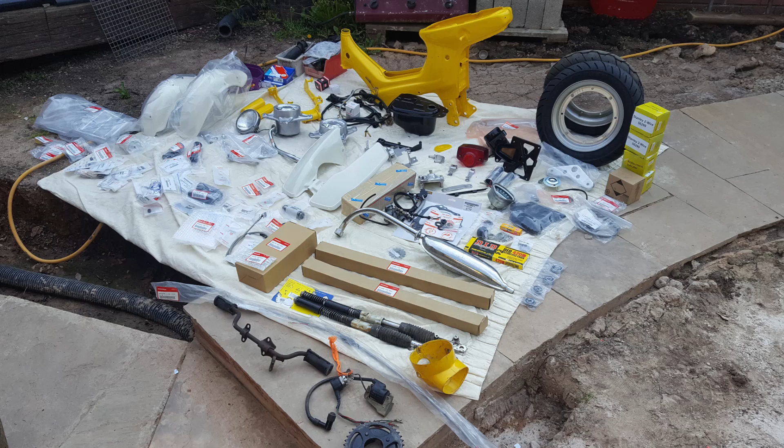The hubs were meant to go away for paint with the frame, but unfortunately this hub needed repairing and I just didn't have the time before I could take the frame in. It's a genuine hub, but unfortunately it suffered at the hands of a complete and utter moron who's prized it apart with a screwdriver, crowbar, whatever. You can see it happened some time ago. There's quite a bit of dirt within the damage.

I've cleaned this one up. It's a very thin wall there and it forms like a labyrinth seal, so it's not structural, but we still want it to look good. I think they're worth saving, these hubs, because the genuines, if you can get them, are very, very expensive, and I don't want to put an aftermarket on. I want to return them back to their original painted condition, so I'm going to try and match the colour as close as we can.

I really am not looking forward to this, because it's pressure die cast, 40 odd years old. God knows what's in it. It's aluminium, it's thin, and unfortunately it won't fit on my lathe either. It's too big a diameter for the throw of my lathe, so we're going to have to contour this back manually by hand, and we've also got to create that profile in there. I don't think this one would be so bad, but this I'm not looking forward to. So here we go.

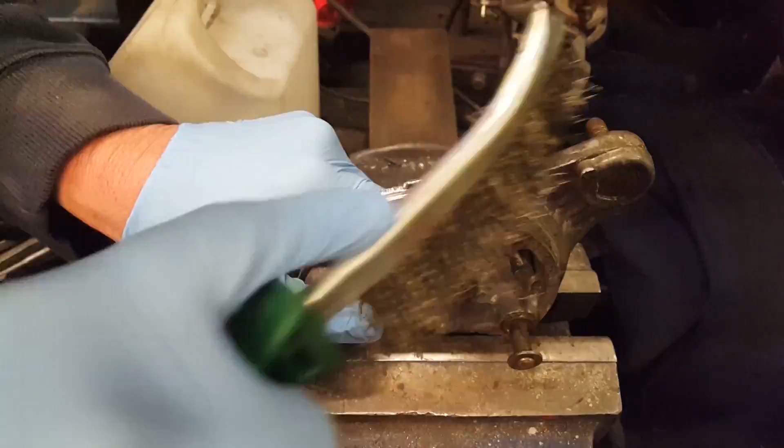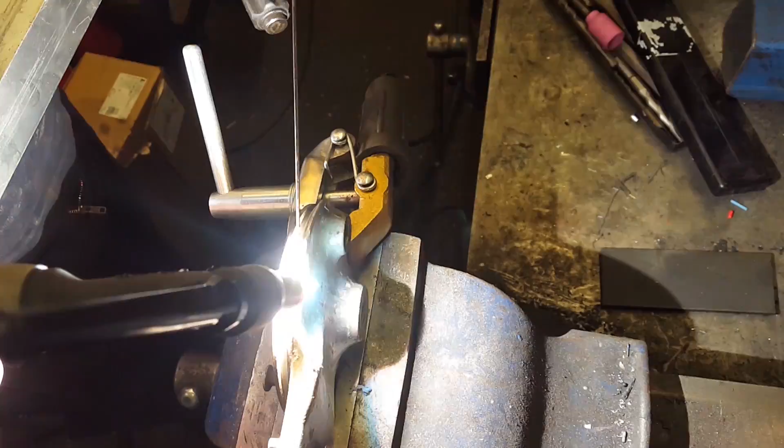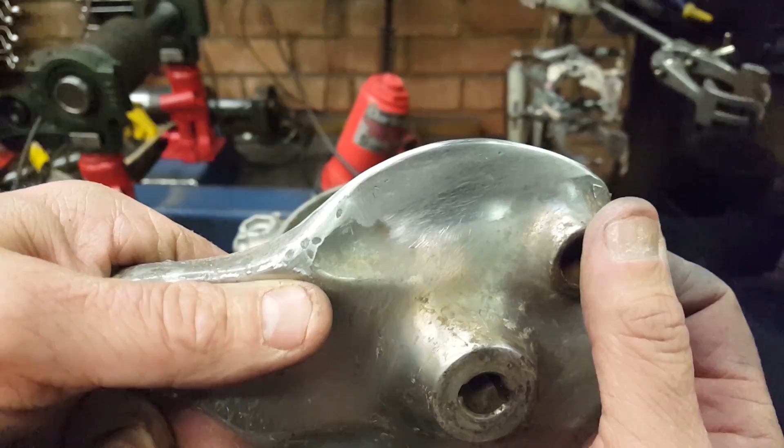I've finished this piece now, and I'm happy with the results. I think putting quite a quick bead, quite a thick bead on helped quite a lot. So we've got the profile back there. Thickness is near enough the same from the old to the new. The radius is good, and I've simply flatted this off. You can still see a bit of linishing marks in it, but the powder coating will contain this. So yeah, it starts about there, finishes about there,

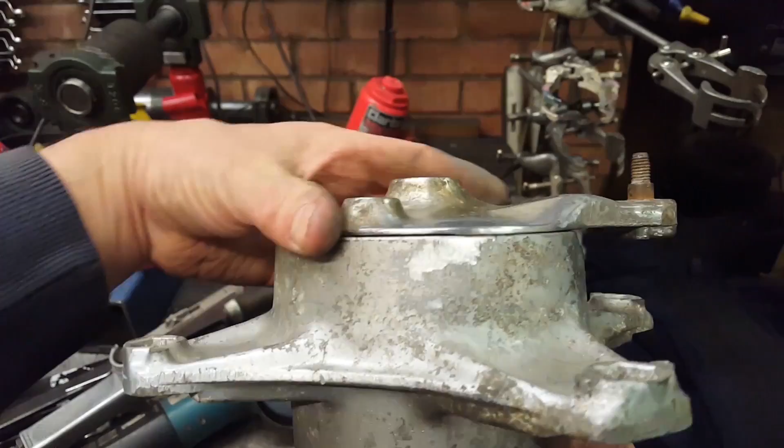and so it's kind of similar to there, about 1/2 mil over. It's about the same there. So that's the outer done. We're now going to do the worst part.

So we've took this back with a linisher, cleaned it there. I'm a little bit concerned that we've got some porosity in the aluminium when I linished it back, so this looks like it's going to be fun. So we've took it right back, just going to use a bit of acetone, clean it up, and we're going to go for it. I'm going to weld it from the inside of the hub outwards, so any excess starts to build on the outside, which is what I'm hoping to come out, rather than going from the outside in and making it harder to get this profile back.

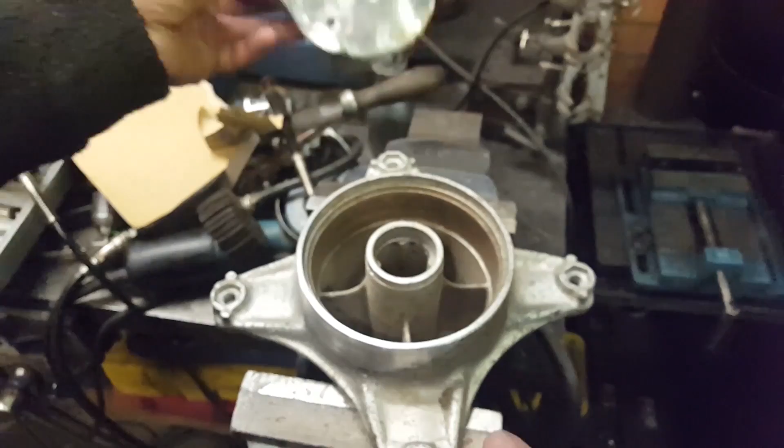So we're all finished now, and we're going to get these up the shop for paint. So I just showed you that one previously, and then this one's all finished now. It was all done by hand. As I said, I didn't have a lathe big enough to fit it. We've got some tiny dots of porosity in it there. Maybe a bit of muck has come up. I mean, I'm welding inside an old brake drum. God knows what's inside there, asbestos, whatever, who knows. So you can see some tiny little dots there, but I can live with that.

I've simply done this with a series of belt sanders, linishing discs, and then by freehand using files. All the inside was done, roughed out with a little die grinder, Dremel, if you want to call it, to get the profile back, and then that was also finished with internal files and sandpaper. So hopefully you can see that as it goes from the old to the new. I measured it up and it's real close. So I'm really happy with that for freehand. So we're going to get these all cleaned up and painted.

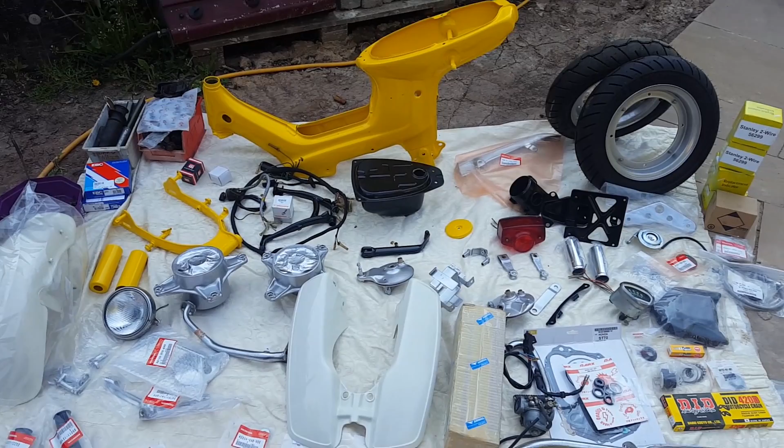There's the two broken sections together. So the collecting is complete. We have parts here from all over the world, literally. The furthest one's Australia to where we are, Indonesia, Japan. It's quite a collection. All genuine parts.

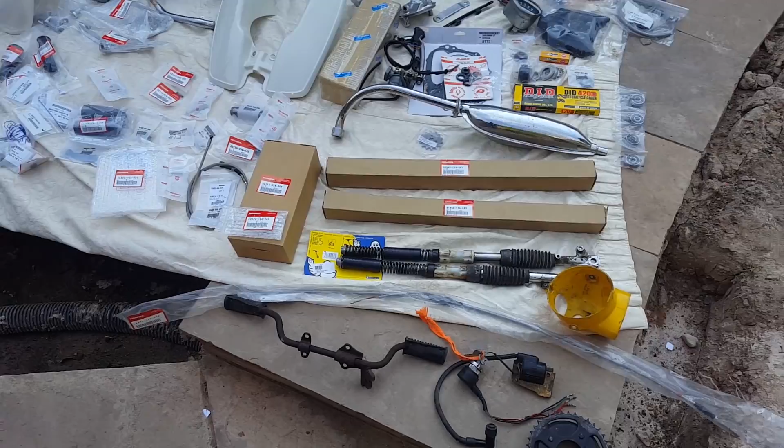The only parts that aren't genuine is, I suppose you could argue, I used SKF bearings. Also for the engine I've used SKF. I prefer SKF, so I chose to fit those. Cables, indicators are still Stanley. Battery, arguably not. This is the original headset. I had this chromed.

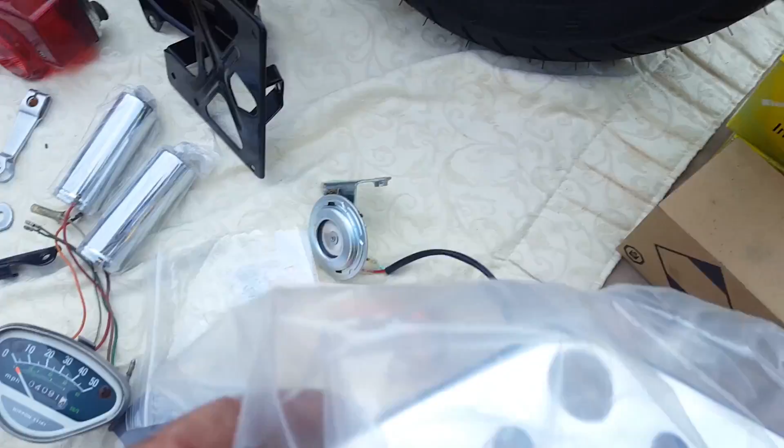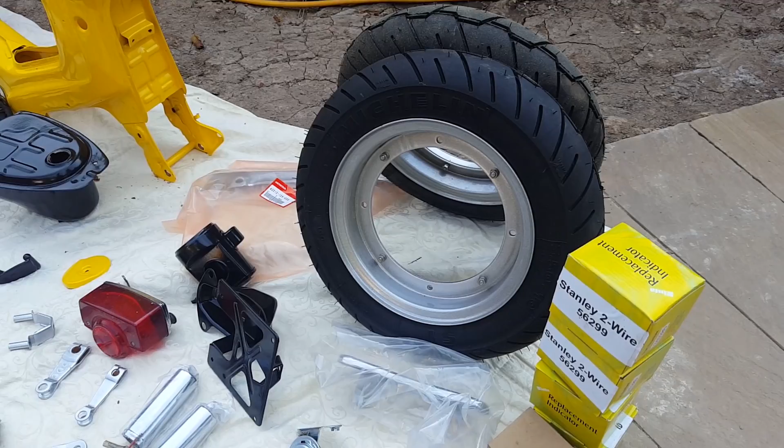The only trouble with this chrome, it's so good, it shows up the Honda chrome as new. Wheels were eBay, and then I had them powder coated. Rear tail light. Genuine light that come with the bike. These were the, are they stainless, are they not, parts of the suspension. I had these chromed by the same company that done the headset. And that is just amazing, absolute mirror considering how pitted they were.

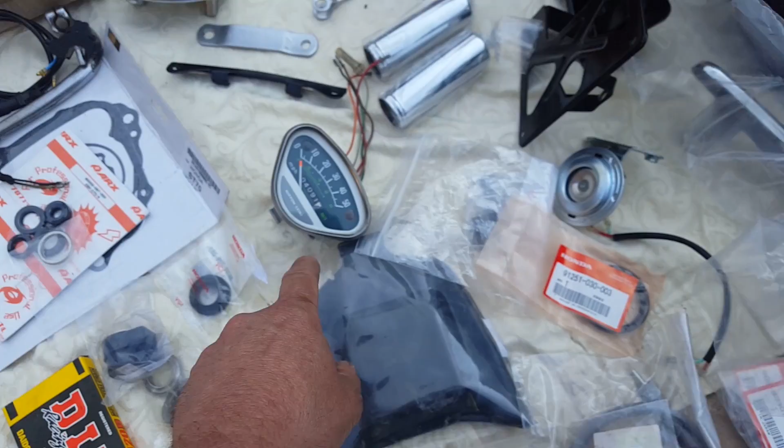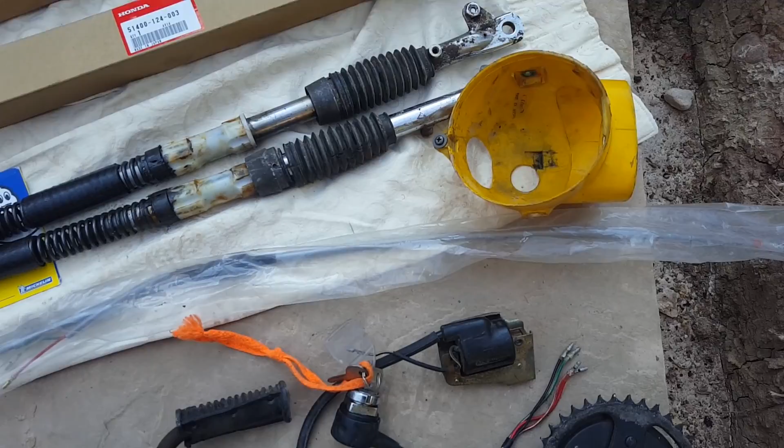Genuine horn, the genuine clock that come with the bike. These aren't genuine because I couldn't find genuine. Every time I went in with a part number, they were obsolete. Aftermarket exhaust, genuine forks with the old damaged forks. Headlight has still got to go away for paint, we've still got to get that done. Chains and sprockets have been replaced with DID chains and sprockets.

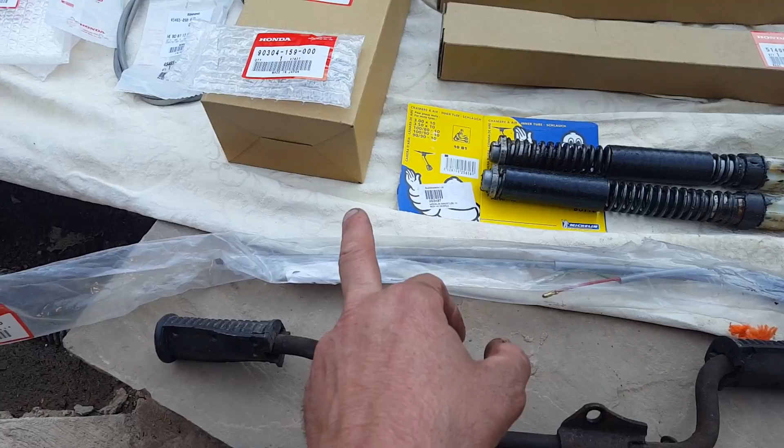Original ignition with the bike, that's bent, but this is what come with the bike. Until I've got the bike a bit more together, I won't know where to straighten it, what to do, and I've got no other one to compare it with. It will stay on it because it's genuine. New mirrors, brake cables. That's genuine Honda, that's not fiberglass, that's not eBay, that's a genuine Honda one and it's genuine colour.

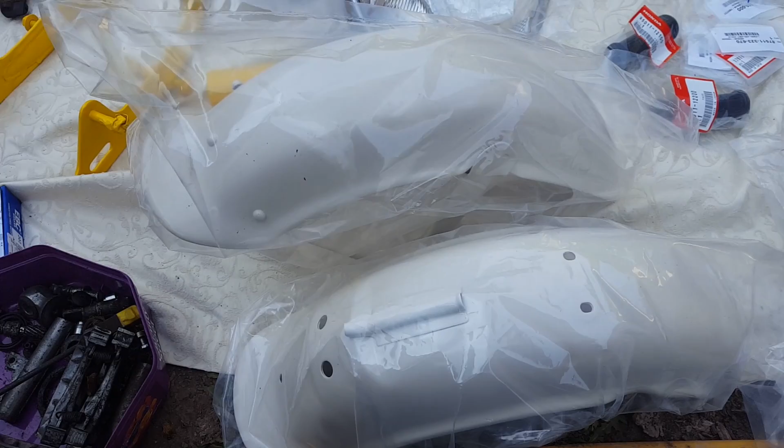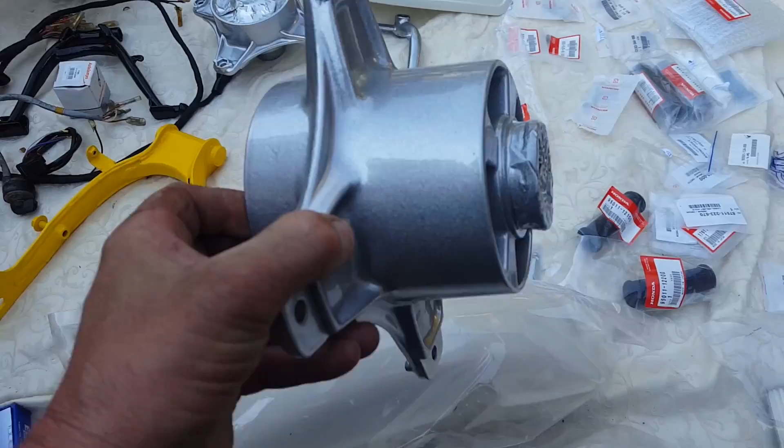These are the mud guards that you've seen in the part 1 video, and I've had them colour coded to match the Honda. These are the hubs that I repaired. Okay, and as you can see, it come out really nice. So all new bearings to go in there. This later appeared for the bike. I had a call that more parts were found, and this is the 2-bulb headlight, which is quite rare now, quite hard to find, so I was really chuffed to find that.

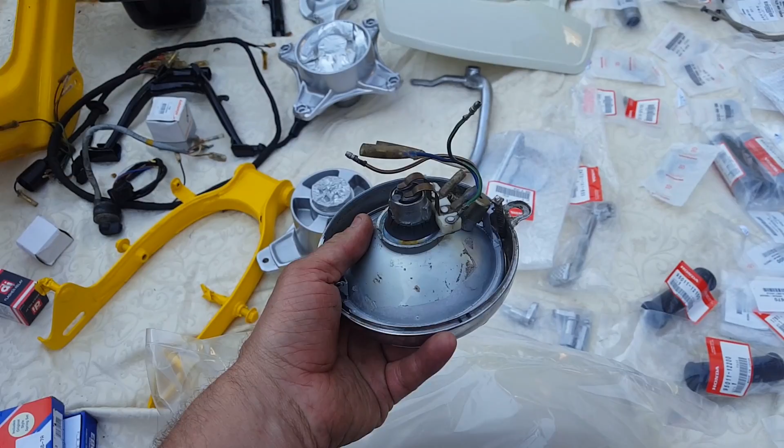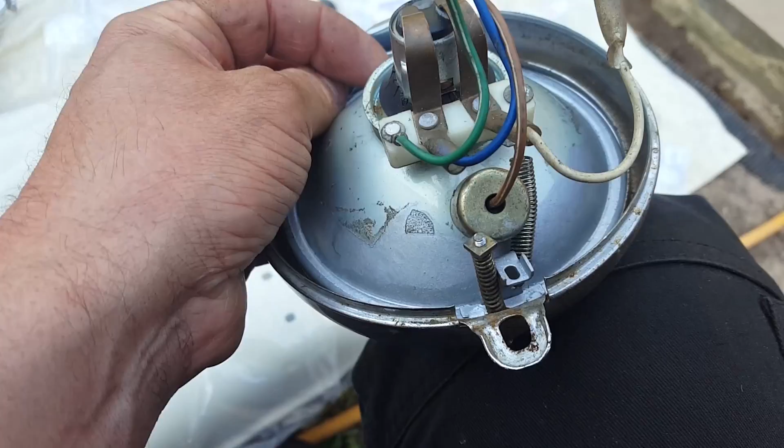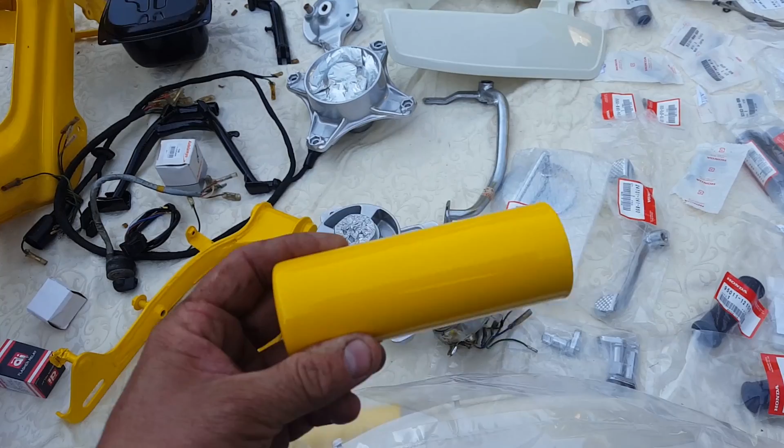The chroming on the outside is poor. I can't find a rim, I don't even mind non-genuine because I'm that desperate, that has the one that takes the split pins just here. All of them are just tabs like this design here. I need the split pin type that takes the 2-bulb headlight. Indicator stems, brand new gear selectors, mirrors. This was what we straightened with the socket.

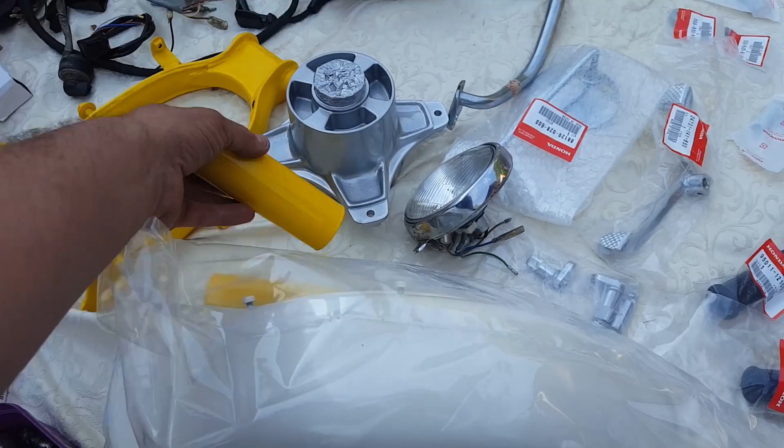This is the rear suspension. Really good job of the powder coating, they've even done inside of the tubes, which is quite rare. I mean, they could skim that, but they haven't. They've done a really good job of that. There is absolutely no dents on there. That's come out really good. There's the other one. Especially in the gloss, you can tell quite easily, and that's come out really well.

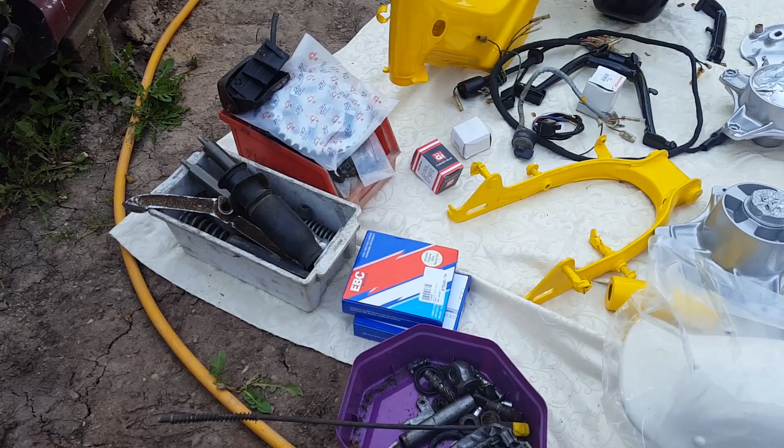This is still my mystery corner. Having bought the bike in a cardboard box, there's bits there I don't know what they do. Obviously I know that's the carb and those are brand new brakes, but we got just stuff in there, stuff there, who knows. More electrics. Stand that come with the bike's been powder coated. That's the tank. Tank's been done. Filter, that is the light that come with the bike. Airbox.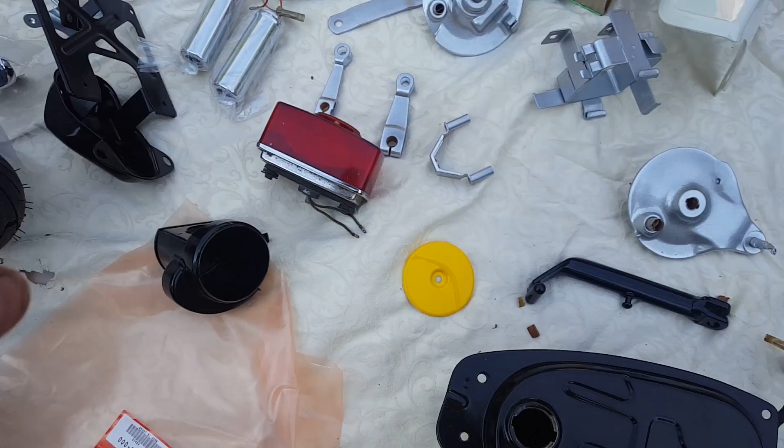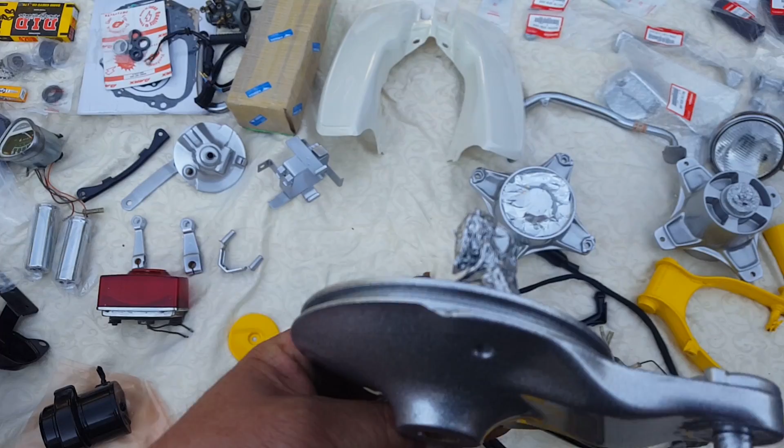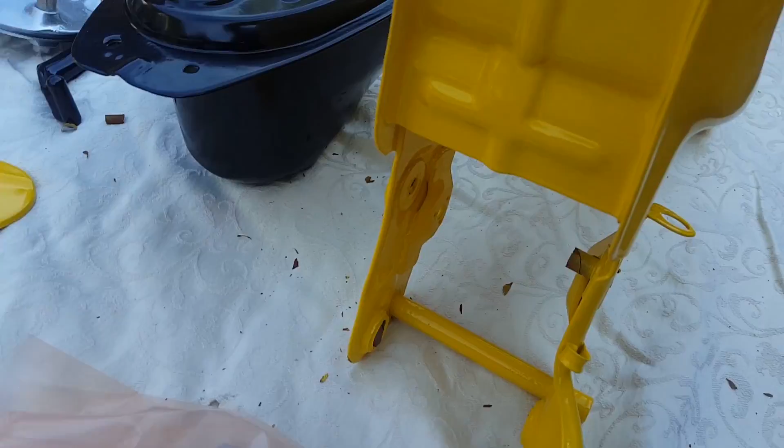New chain guard that, comparing the chrome with what I had done, isn't that good. Battery carrier. Remember we welded this up as well around there somewhere. That's come out really well. Brake units. So there you go, you get the gist. All the paintwork's been done right inside here, which I'm really impressed with. Really was chuffed with that. Right into the seams as well. Remember all the rot down here. All that's been done. Underneath the bike. Really have done a super job of that.

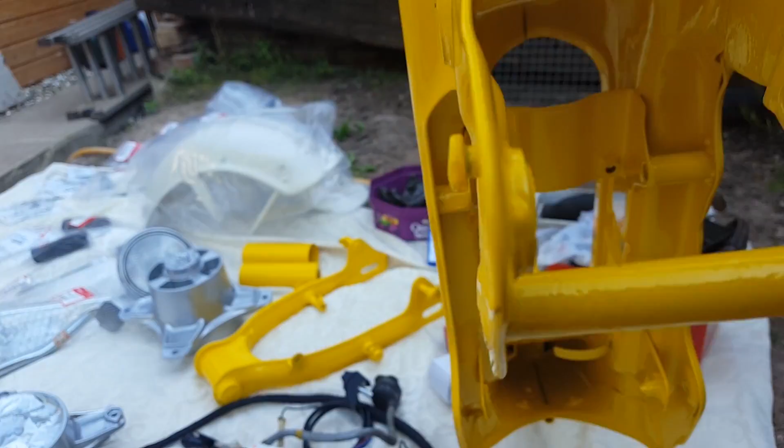So now it's the big build, working out what goes where. I've never seen the bike as a whole, so this will be really fun.

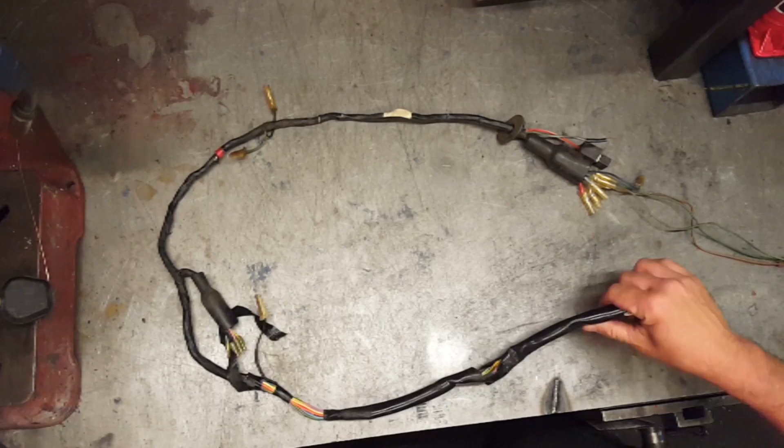Looking at the loom, it's got some areas of concern. You can see this brown earth wire here has gone through. It's very brittle here, the protector's gone. Yeah, this is the front of the bike, so this would probably be where the steering turns left to right and it's gone through. So we're going to take this back here, measure where it originally went to. We've got some damage here, so that will be another wire that we need to change.

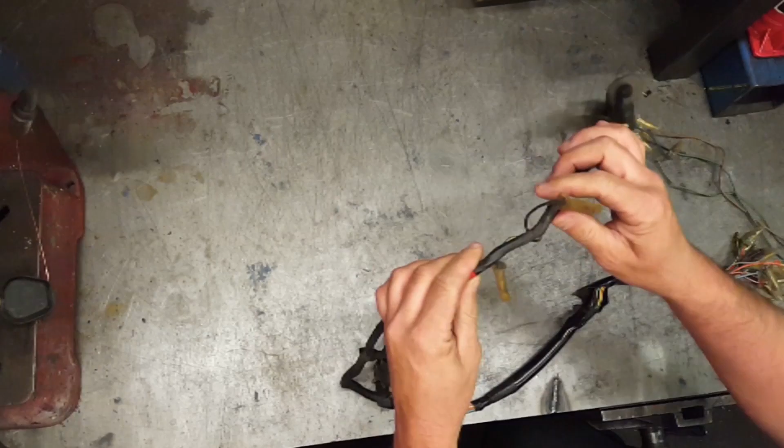Same on here. So we'll cut it back now in areas, peel some of the tape back. It's quite brittle in places round about where the heat has happened. And we'll see what's what and replace what needs to be replaced.

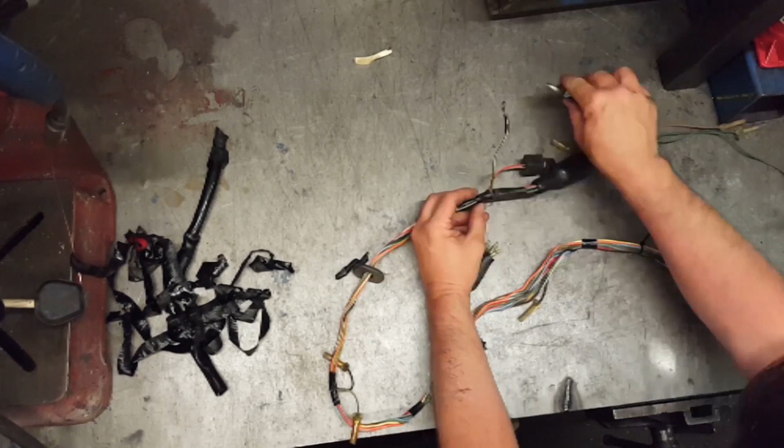So the loom is now stripped down bare. I've taken all the bits of tape that covered the soldered joints.

There's a few here near the rear of the bike, and some more down here, another one there. These are all originals, and some really interesting wiring - it goes black to black, then they drop a red in, then red with a white trace to red with a white trace, then they chuck a red in. I've looked at the wiring, and that is correct for the 1978 Chaly.

So what I've done also is mark down the position of each of the branches off the loom, so if it helps anybody - measuring from the headstock, the headlight at the very end here, to your coil, a black wire, is 520. Again from the head to the engine, which are those colours there - turquoise with a red trace - that's 720.

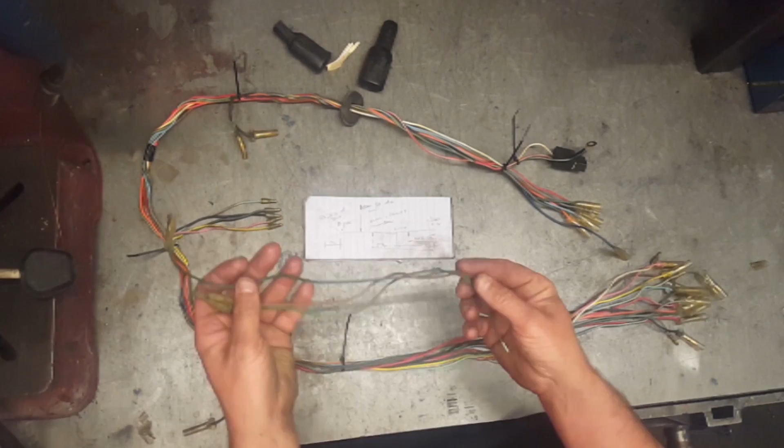The 3 wires that go to the rear tail are all worn through, so it looks like it was resting on the tail light, so we're going to have to change all of those, put new ones on. The brown, as we've seen through the damaged casing, has practically gone through, and the red has got a nick in it, but when you look closely there's a lot of water ingress there, so we're going to change the red. I don't have this 4-way setup, so unfortunately we're going to have to joint that wire.

I didn't want to do that, but I haven't really got a choice. Plus I wanted to keep the original connectors if they were in good nick. So that's where we're going now - a red, a brown, and a bit of work on some ends.

We have got something going on down here. It's quite stiff, the wiring. There doesn't seem to be any insulation cracking, but that's very, very stiff, so it's obviously been round a hot area, or very close to the exhaust or over the back of the engine. So I'm hoping to get away with that area, but I think we'll have to do something there.

And the solder joints seem to be okay there, so we'll look at that later. So let's get on with that then.

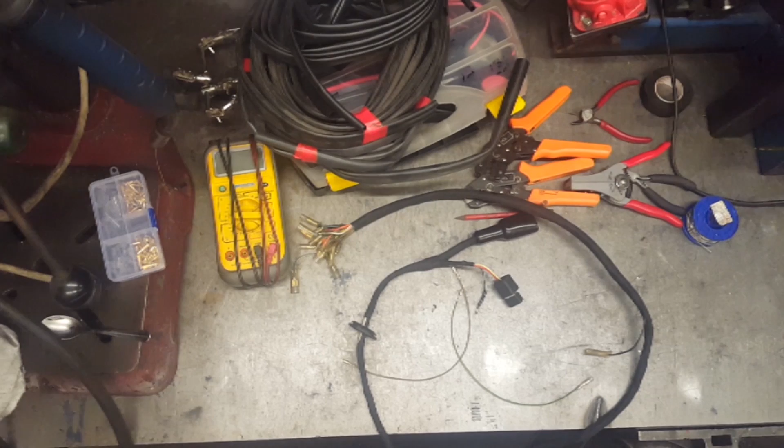Okay, the loom's now finished. I replaced the damaged wires that you're seeing. I also managed to get hold of 2 new boots, genuine Honda boots for the ends. I got hold of a genuine Stanley new old stock rectifier because the other one had a crack in it. I thought I'd better get one.

I also got this grommet, that's from CSML or something like that - managed to get hold of that. I reattached the original serial number for the loom and covered it with heat shrink, just for the nerd factor. What else did I do?

Oh, the hardened section that was around about here where it passes over the engine - although it metered out, and it metered out good, there was no higher resistance over that section, it did concern me, and I'm not interested in stripping this part down again, so I have replaced a number of wires in there. Luckily, the ones affected by the hardening were the ones that were jointed from there to there, so I only had to replace sections between two already joins.

I've made - I presume these go to the tail light, I don't know because I bought the bike in a cardboard box - so we have 2 new wires, as close to the Honda crimps as I could possibly get, and made off the same.

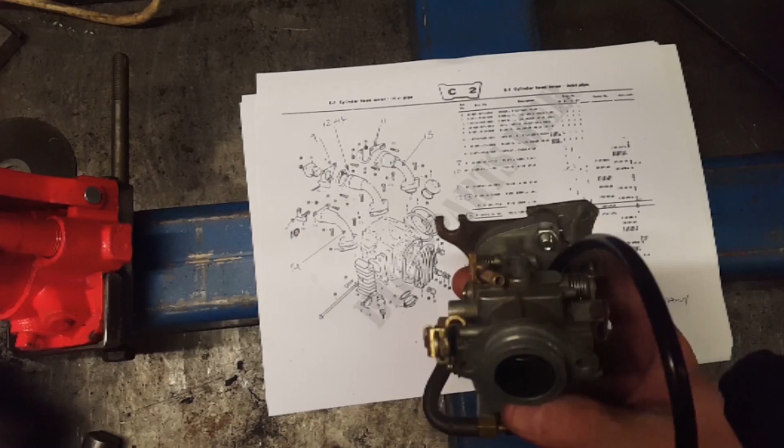Had a really fortunate call from the chap I bought the bike off. The carburetor's turned up. It's the original carburetor off the bike, a genuine item for a CF70.

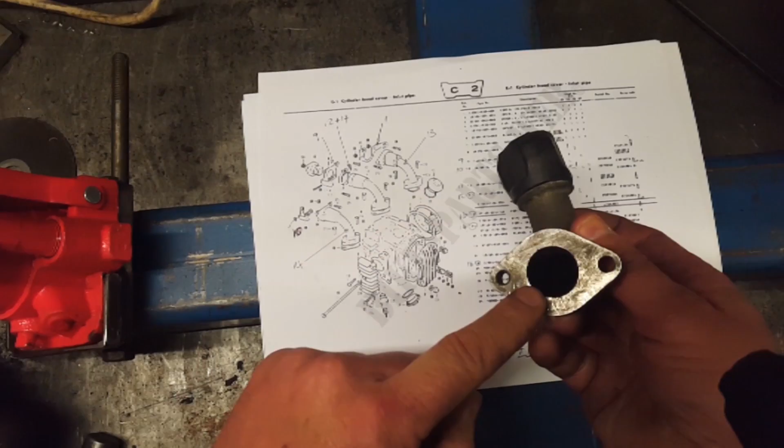But God knows what's gone on here. This is all the original parts. If you look at the manifold, which is that one there, it can't be that one because it hasn't got an O-ring, and that's got a cast flange. Can't be that one either because that's the Jubilee clip design, which this one isn't. So it's got to be this one here, with a gasket.

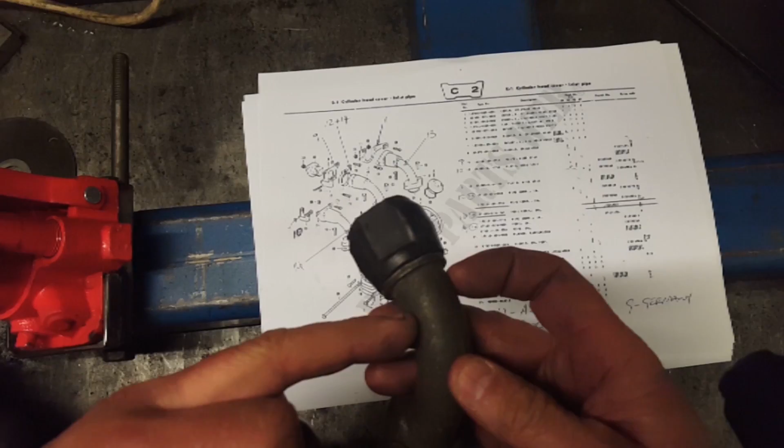That bracket there, called the wire stay, used to be part of this manifold. So it went from steel to aluminium. Somehow the two were attached, I don't know. I can't get one of these. It's got to be this one, it can't be the other design, and it can't be a modified one.

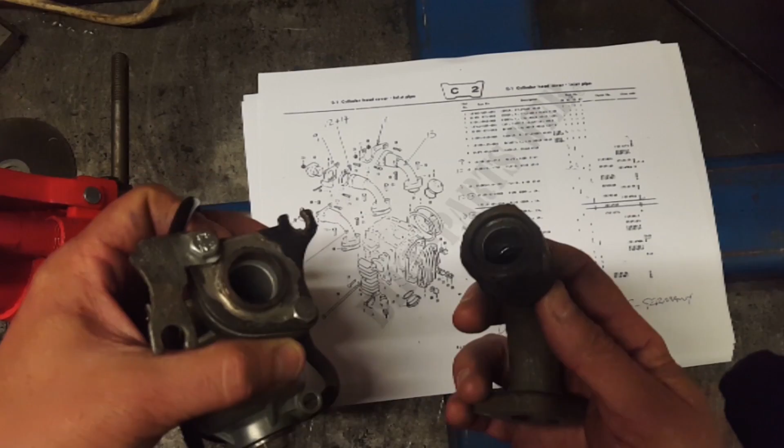I've got to get hold of one of these, which isn't going to happen because I've been trying for some time. So we're going to get that out of there, make a sleeve for it, TIG weld it together, and then bond it into there, bore it out, bond it into there, like it would have originally been done somehow, using some sort of adhesive or bonding that's impervious to heat and fuel.

This bracket here, which has been butchered and cut, is all original. Nobody's modified this, you can see the stamping marks all the way around it. So that's definitely the original part there. If you imagine that's back in there, it just about rests on at the moment. That bracket there, with hacksaw marks all over it, bent and straightened, would have been that bracket there.

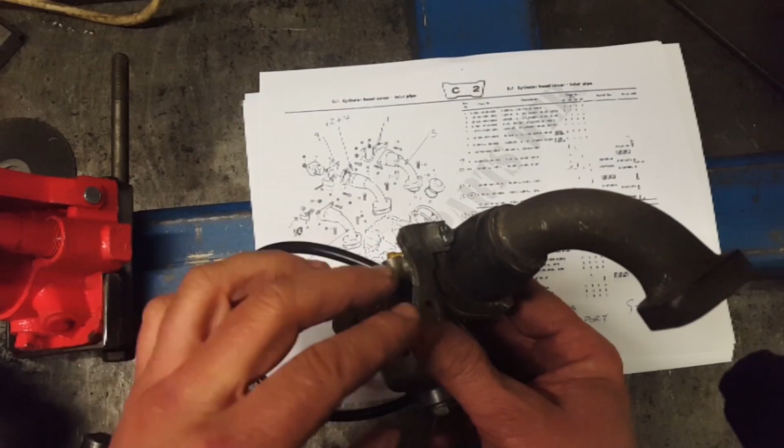So we're then going to use as much of this as we can, rather than starting again from the beginning, and make that bracket there. And that's the next step.

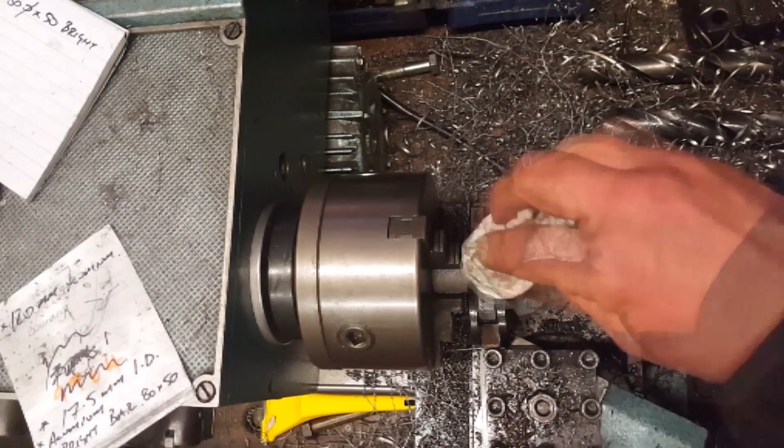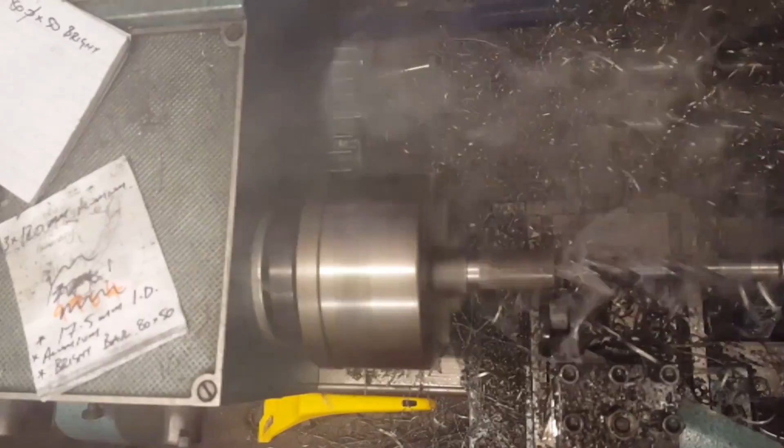Okay, the ID of that now is 22mm. I use the step drill with some gear cutting oil. That tends to be what I always use, gear cutting oil, basically because it's free. That's why it smokes a bit on the lathe. I use the step drill because it's thin. You wouldn't get away with a twist drill with that, it'd just bite and fly off everywhere. A four-flute drill I suppose you might, but I don't have one. So yeah, that's now 22mm ID.

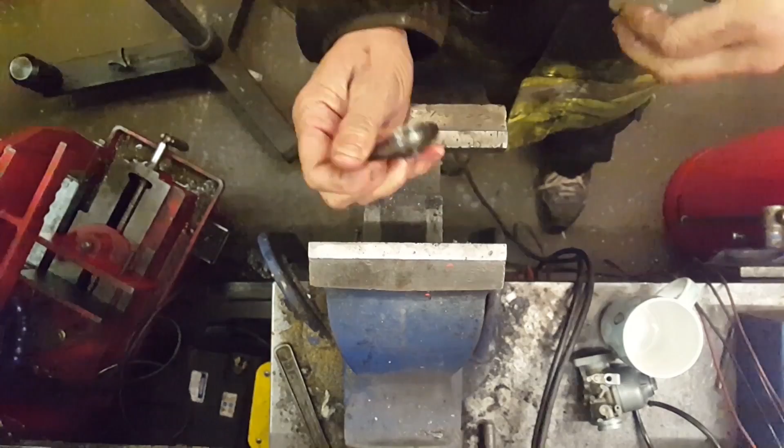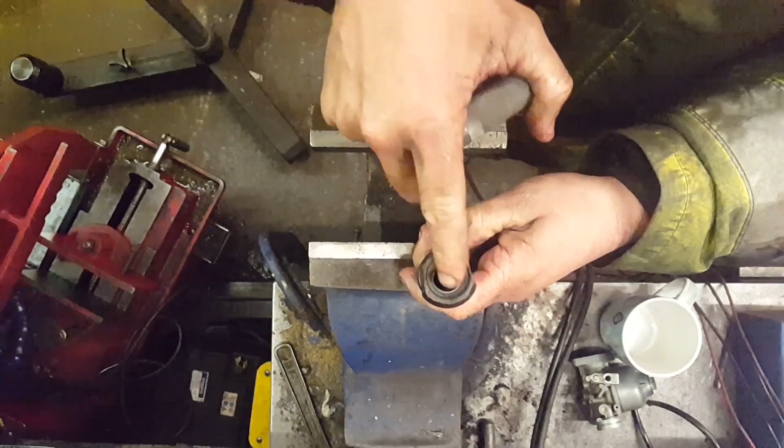This is the finished sleeve that will go into the manifold once we machine the inside out. The OD of that is still less than that. I've knurled it so it gives the bonding agent, resin, whatever we choose, a bit of a key onto here when it goes into there, when we press that into there.

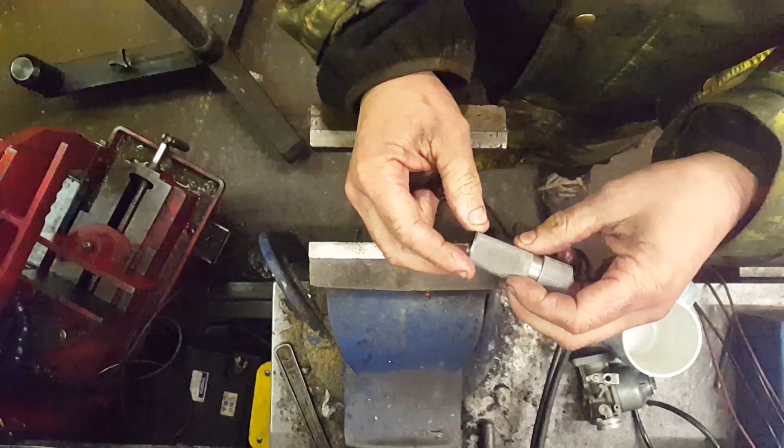Secondly, that is 22.1mm OD, so that will give us a nice press fit into there, and the knurling will help it key into there, giving us a bit of strength prior to us TIG welding along here and then making that flush for the O-ring, which goes on there. Okay.

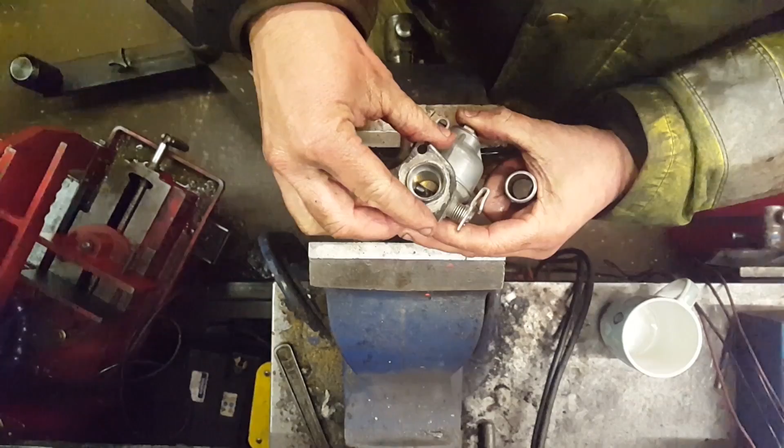You see the chamfer that I turned in the collar, so we've got a 45-degree chamfer there. We've got the butchered fitting from before, which we've actually benefited from for once, and that's also chamfered. So we're going to do a nice bit of TIG welding all the way around there, then grind it flat, check it's square, and cut that off. I'll possibly do that in the lathe once we've finished, and then we'll look at machining the manifold.

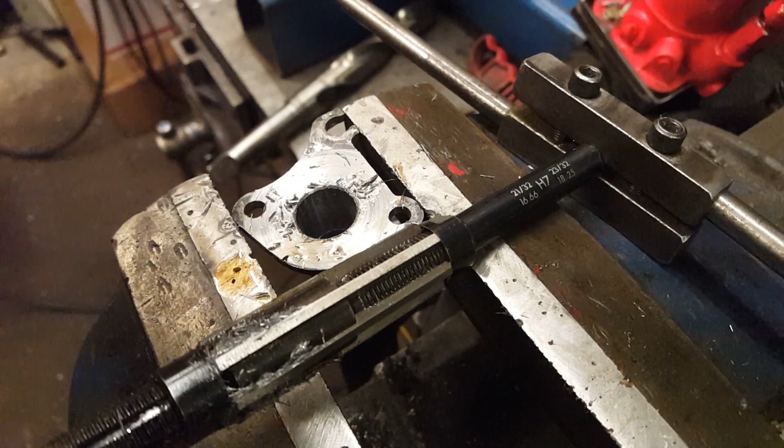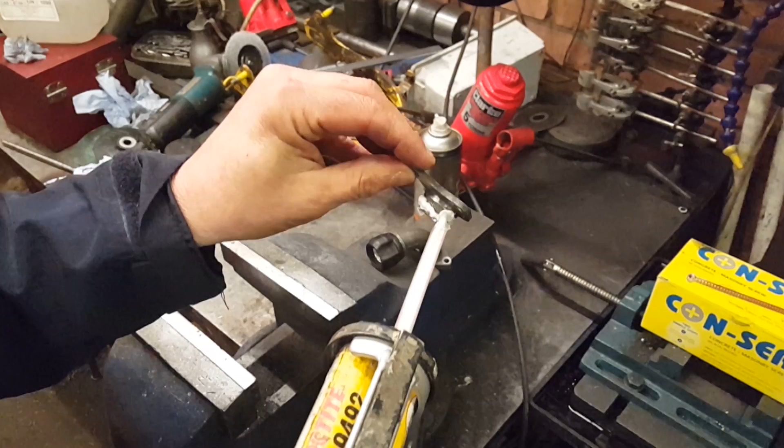I'm hoping to fill up that little rebate there as well, that's why I put so much in.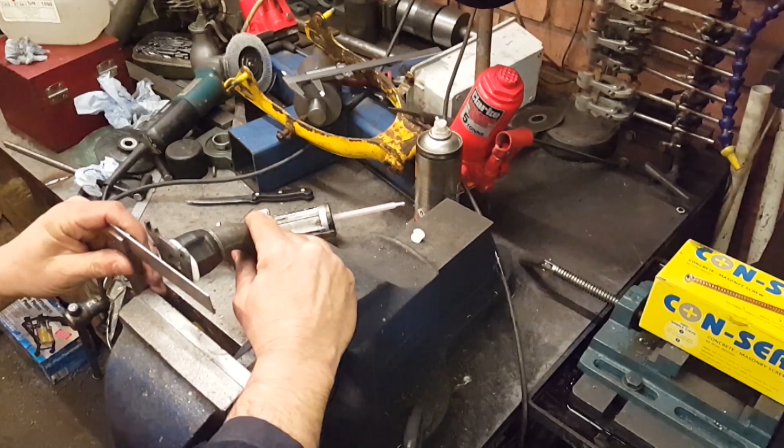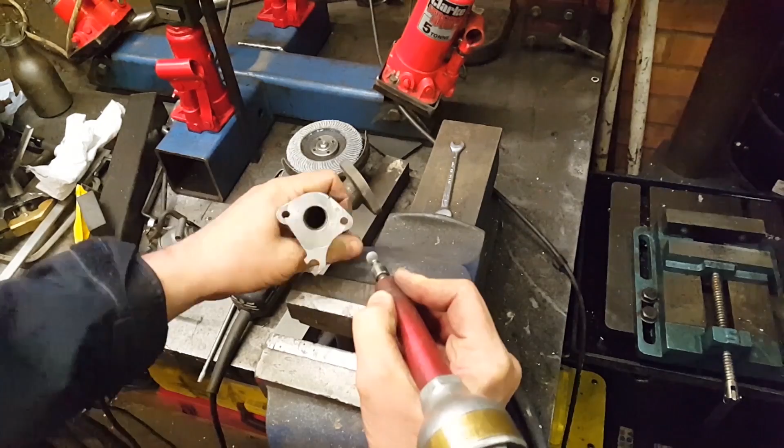So we've set all the wiring up, basically without the bike, that's the only thing missing. This is everything wired as it should be. I've tested indicators, lights - if you can see that - everything lights up as it should.

There's a lot of new components gone into this, switches, relays. So yeah, what we're going to do next on the loom is just attack it. But most importantly, that works.

So once the frame's back from painting, we'll start putting it together, and in the meantime we're going to start taking this engine apart. You can see the manifold now, it's all finished. The glue's held, at the moment anyway. So it's lovely to use the original components there.

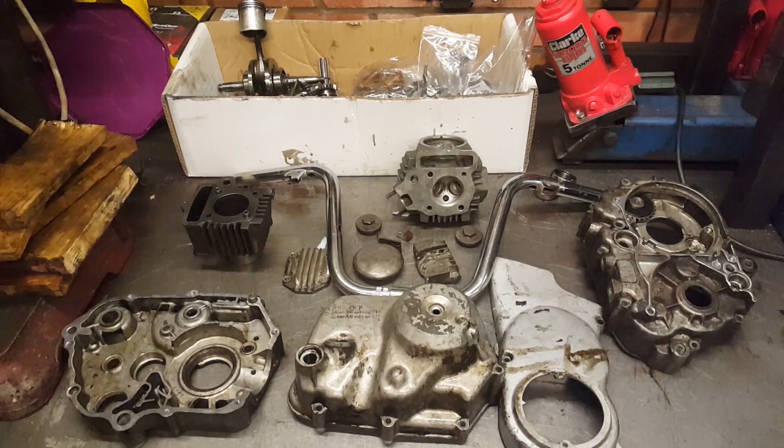So to wrap this video up, all these parts now are going to be dipped in degreaser and get powder coated. So all the casing parts, we're having that original black, everything's going to be the original silver, little brackets, what have you, polishing that up like it should be.

I've left the oil pump drive shaft in because it's a press fit, and until I actually physically have one, I'm not going to start pressing them out because it's not going to go back together right.

I will be doing a full in-depth slow engine rebuild, not the crude 'let's just get it to bits, let's get it up the powder coat' as quick as has been the case here. We've been harsh on some parts, taking them apart, because basically we're not keeping them.

We're having new piston rings, new mains, new cam chain sprockets, new gearbox bearings, the clutch obviously.

I was a bit disappointed to find that. So yeah, clutch plate, clutch inner. I'm not going for a sports clutch or anything of the sorts, I'm keeping it genuine Honda. The only thing I am doing is going EBC heavy duty plates and springs.

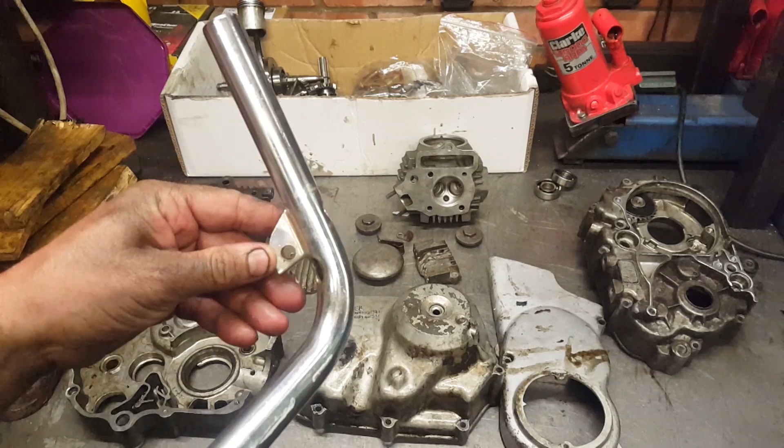This bike hasn't got a clutch, it's an auto clutch. So it's just from when it's been crashed. Also the bars are bent, so we need to heat these up and straighten them prior to chroming. I'm not in a rush for the bars because I'll only trip up on them and catch my coat on them and end up pulling the bike over as we're rebuilding it. So yep, those need doing.

All the mating faces now are clean, but they are going to have a light oil stoning just to make sure they're absolutely flat and no problems. On the engine rebuild, I'll be measuring clearances as per the manual, wear tolerances, everything, and we'll be replacing parts as and when we find them. Full gaskets, full oil seals.

And that's it for this video. The next video out will be the frame rebuild - so one video on the frame rebuild, all back together and done.